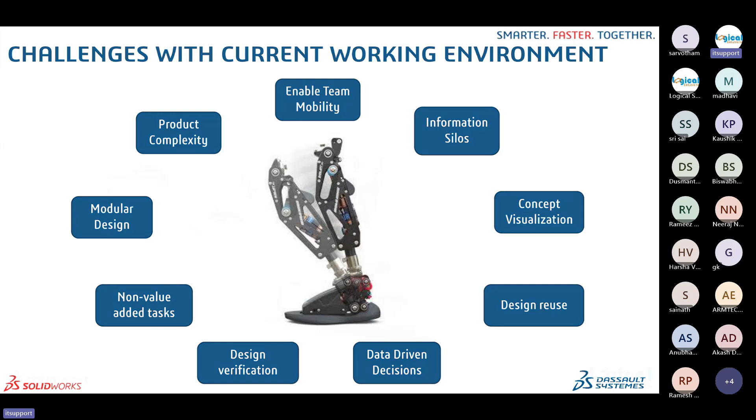For better understanding, I have taken an example: product versus platform. A few years ago we used different products to meet our daily tasks, but now everybody has shifted to platform, which brings all products into one platform on a need basis — download the app and use it. So platform is the future.

Let's take a moment to review some design tools and collaboration tools like Gmail and WhatsApp. Even though we use multiple products for collaboration, all these products are disconnected, and information from this results in an inefficient work environment. In personal life we have all moved from product-based to platform-based solutions.

Are we doing any justice to our work life? To address this and co-create collaboration in our work environment, I'm going to show you 3D Experience, and how it is very useful as a platform for collaborating across teams.

Another challenge: when we are working with other people, we are working anytime, 24 by 7, so we need to be able to work everywhere. How can we connect people by sharing ideas and driving innovation?

Now we'll see what 3D Experience is. 3D Experience is a cloud-based platform that helps businesses design, simulate, and collaborate on projects. It allows users to access applications for engineering, data management, and more.

Some features of 3D Experience include collaboration, data management, virtual modeling, and virtual twin experience. Collaboration allows users to work together in real time across departments and locations. Data management allows users to access and manage large amounts of data in one place. Virtual modeling allows users to model enterprise products and processes virtually.

In virtual twin experience, it provides a virtual model of the business, which can help reduce the cost of waste and investment. Also, 3D Experience is a named-user login.

Named user login refers to accessing the 3D Experience platform using a unique username and password tied specifically to an individual user, meaning you can log in from anywhere and any device, and access your personalized workspace and assigned software licenses rather than being tied to a specific computer or serial number. Essentially, it's a named user license where your identity is the key to accessing the platform.

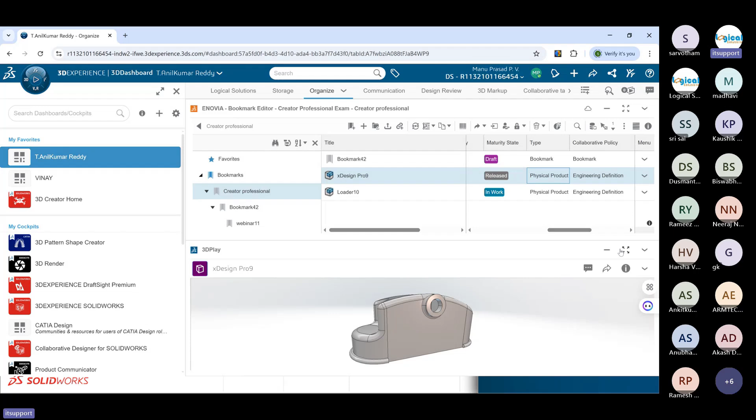So if the manager wants to review this part, he will just drag and drop it into the 3D play where he can see the part. And he wants to get a clear review of this part.

In the olden days, how they used to communicate for design review, they would take a screenshot of this part and attach it to Gmail, then send it to the particular person. But in the meantime, it may become data silos, because with so many mails, they may not know when they sent the mail, and they did not keep track.

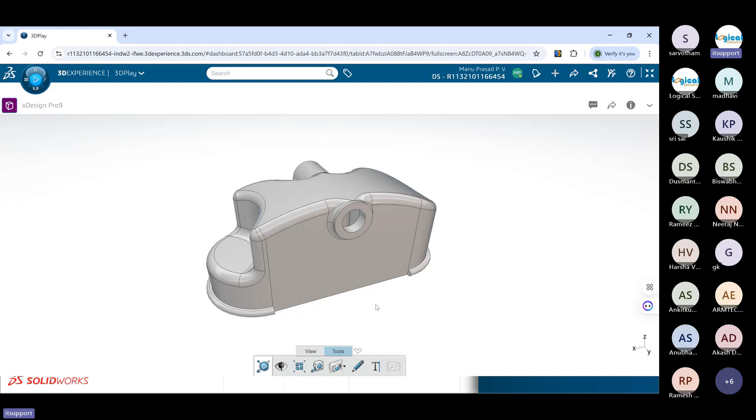So for communication purposes, on a platform like WhatsApp and Facebook, here the manager can directly communicate with the specific person. So here you will just mark this, and you can add text also.

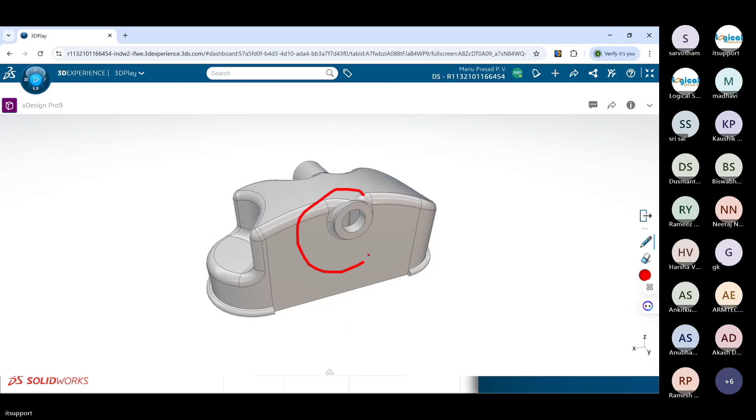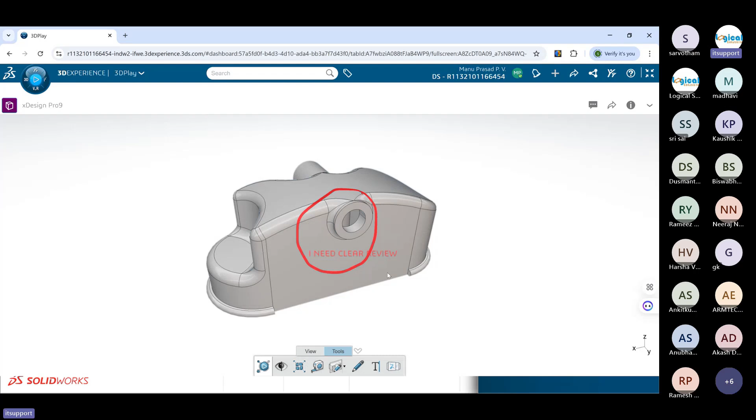You will add, I will write. I need a clear review, so I need a clear review that you can share to a specific person or a specific community.

So this is the community. I will select the community, 3D experience, and the title, and I will write the review. So I will publish this to the community.

So it will be published to the community. The person will get the notification when he is present in the community. So you will get to know that the manager has posted some design change, and he will see this one, and also he can ping to another person directly.

Just I'm adding the other person, so he can ping directly to another person, meaning for the design review. So after seeing this, Manu Prasad, what I told means I need just a clear review for this.

So for the clear review, you can just communicate with the person, the manager, like with a voice call or with a video call, and also you can share the screen for clear explanation of what he needs to change.

So after getting clarity from the manager, he will move to the design review. For that, some specific app is there, like collaborative life cycle. Here the designer or the designer head can know the maturity status of the part, whether it is in what work condition and what are the revisions.

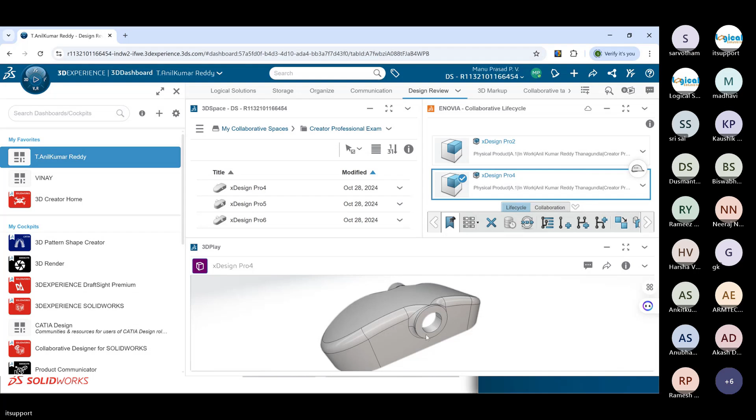For the design change, he needs some markings, some clarity, meaning some markings of where it needs to be changed and what is the specific location it needs to be changed. So for that he uses some other app called 3D markup.

Here in 3D markup, the designer can mark the drawings, and he can do the cut section of the part, and also he can check the volume query of the part, and he can generate issues directly from there, from the 3D markup. So we'll go for the 3D markup.

This is the 3D markup user interface, how it looks. So this is the part that the manager wants to review, the full review, and the designer gets to know that some of the designs need to be changed.

So he is using the 3D markup for clarification of the design review, what needs to be changed, and for the marking purpose he will open this one. So it is opened in the 3D markup.

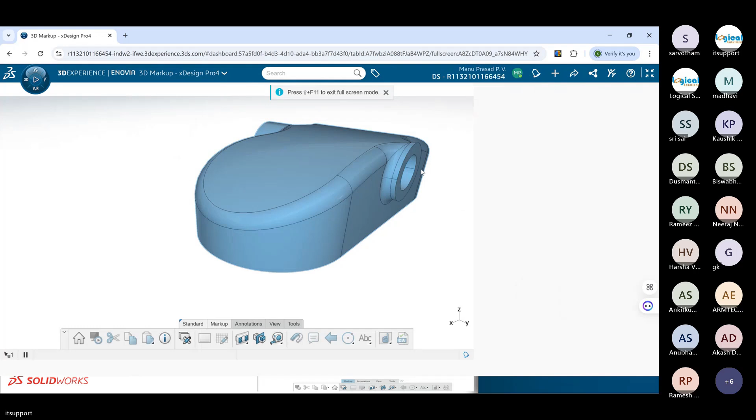So this part is opened in 3D markup. In the 3D markup, some of the tools, here you can see markup. Here you can do the sections, and also here you can do the direct compare, and here you can measure.

And here are the annotations, meaning we can turn on and off the annotations present in the model. Here this is the view, and we can set the appearance of this part.

Here this is the tools where you can check the volume query of the part, and also we can directly go to the relations, meaning it will show the relations of the part, and also it will show if any 3D markup we have done initially, so it will show in the relations. And also we can generate the...

This is the 3D markup. So he uses this markup tool for marking up the part clearly, like a PPT we can do, like 3D PPT, 3D PDF we can use this one.

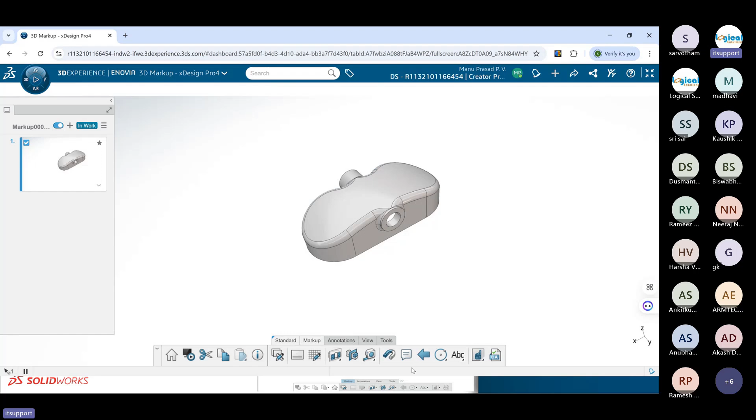So you will create this one, just with a single click you will create this one. So he will measure this one, he will measure, and you will add the text. You will add the text. This should be changed to 16 mm. This is another one.

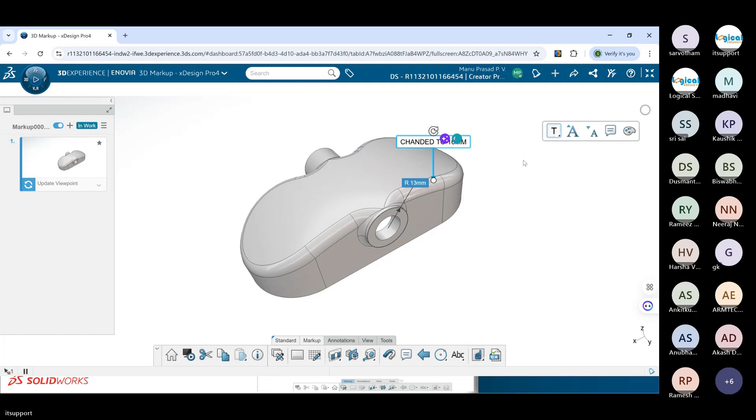This is how he can use markup and create a PPT. So for another view, like this is one view, I need to change, I need to mention, I need to mark here, and I need to show, but on the single slide I cannot show, it may be too clumsy.

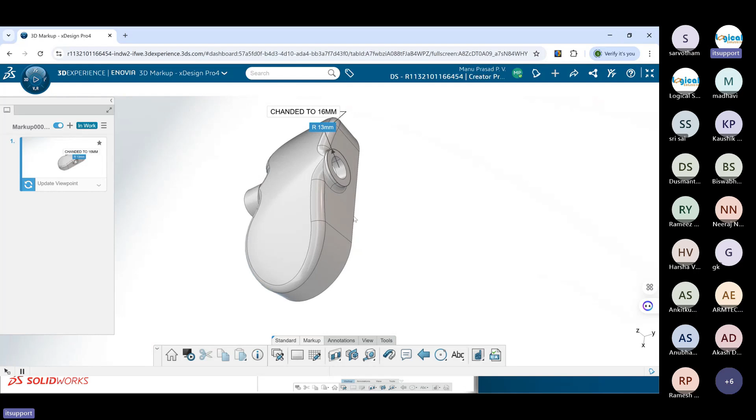So he uses another 3D PDF like PPT. So he will do the cut section, where I need to mark it, and also we'll mark it here. I can change this color also, yellow. I can change this, and he will mark it here.

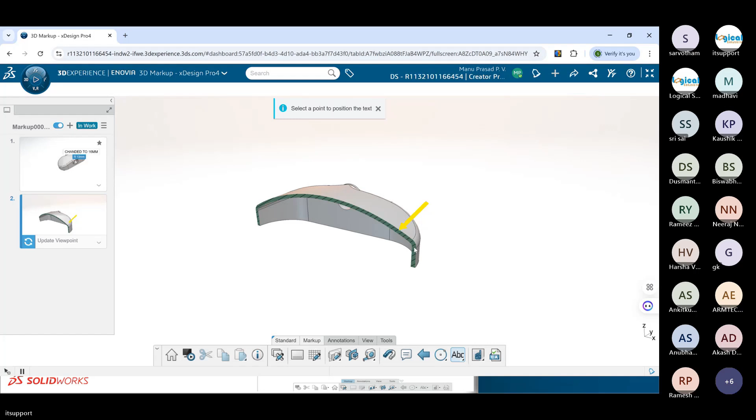Here, okay, just he will write to change the thickness. Change the thickness. Like this, we can use the 3D markup for clarity of the part, for the design changes. So you can mark it and you can publish, and you can attach the files for the design changes.

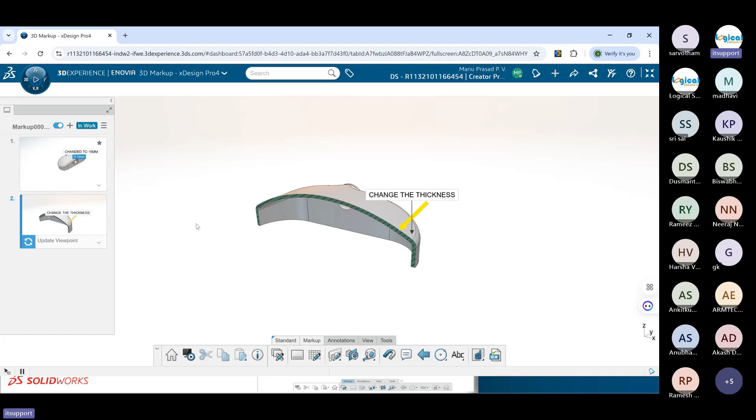So after getting this clarification, for the design change, you want to assign tasks for some specific team and specific people. For that, you use another app called collaborative task.

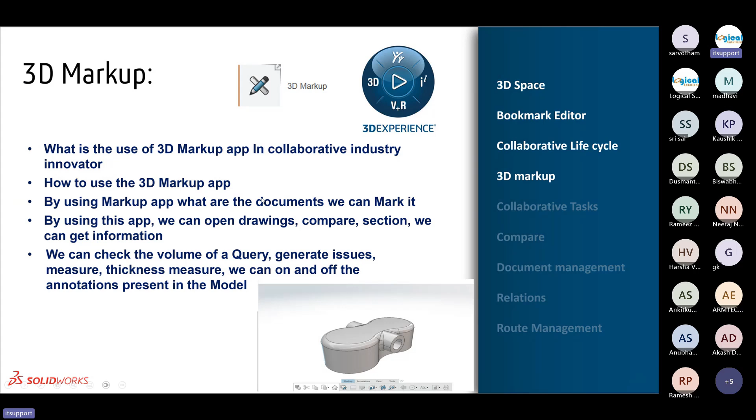So here he can set the work status for the specific team or the specific project, and also he can set the time of work start and also time of work end, and also he can track the work status of the task that has been provided to the specific people or the specific team.

So you will go to the collaborative task. Here you will generate the task to the specific team. So from the manager, he will generate the task to the designer, or the designer head will generate it to the specific team present in the team. So here just you can click new task. Here you can give the title of the task, meaning I will give like design changes or review. Design changes. Just you can click create.

So now the task has been created, but we did not assign any people to work upon this task, and also we did not assign any attached files for working upon the part.

So here we can set the priority of the work status, like low, medium, urgent or risk, and also we can set the maturity status, whether it should be to-do, in work or completed, and also we can set the plan date, when it needs to be started and when it needs to end. And also here we can attach the files, either directly taking the files from the collaborative space, or we can upload files from the local files also. And also here we can create some checklists.

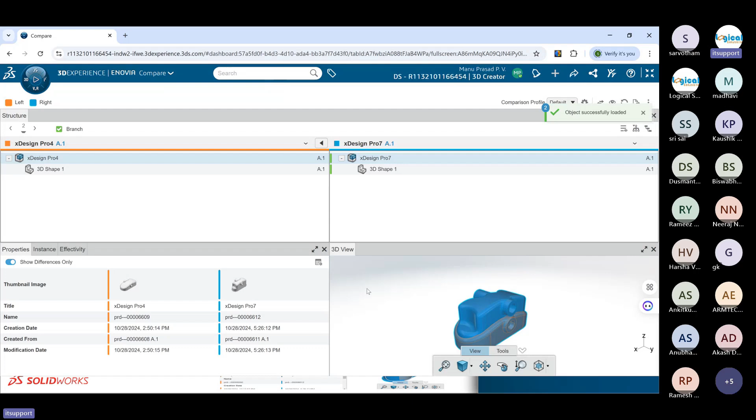So you will get to know what design change was made and in which part, and if the part is added with extra material or anything, you will get to know.

So here you can see this is the xDesign Pro 4, it is distinct with a different color, and also Xdesign Pro 7 is distinct with a different color. You can also see some preferences have been compared, like name, creation date, modification date. Here you can see thumbnail, type, name, revision, creation date - these are the preferences you can set for the compare.

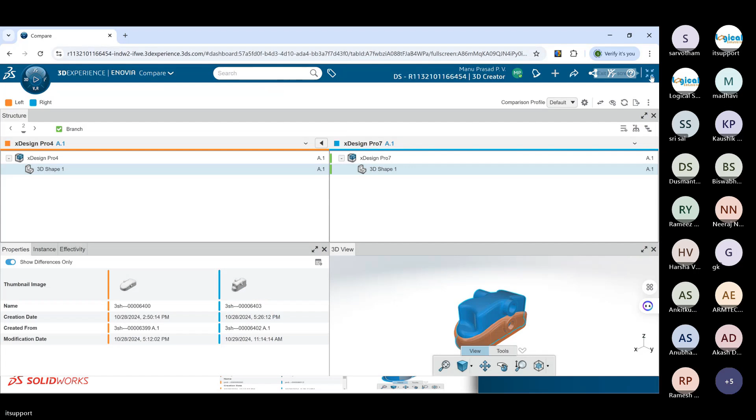So like this you can use the compare app for comparing the revisions or any part which has had design changes made.

So up to now we have seen the collaborative life cycle, task, 3D markup, and also design collaborate bookmark editor, and also organize for the storage 3D space. But as a manager you need to manage documents like both CAD and non-CAD data, and also manage some files which are present in the local disk as well.

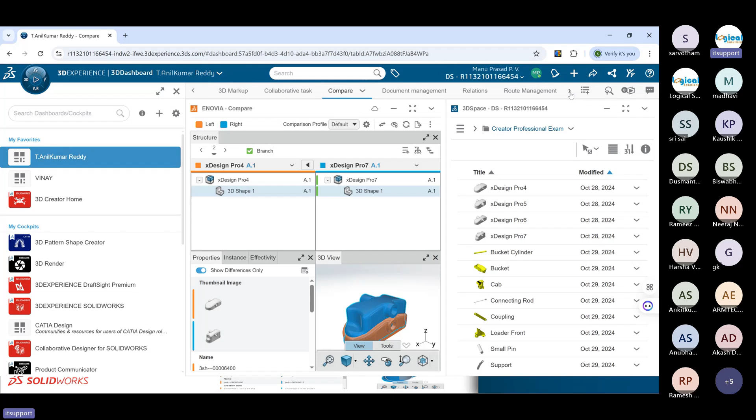So for that you can use the document management app. Here in document management app you can directly upload files from local files to the 3D experience platform, and also directly get the revisions present in the document, and go for the compare directly from the document which has been uploaded to the 3D space or document management.

This document management will directly sync with Microsoft apps like Word. Directly he can edit from there and save. This is the document management, how the user interface looks - here you can see there are upload and new document options. If you click the upload button, you can upload directly from the desktop.

Cancel, and also here we can filter, meaning we can filter when we operated like past year, past month, and past week.

Now directly we can upload this file from here, and also you can see the type of document, revisions, last revision, files, number of files present, lock status, who is the owner, and what is the maturity state, in which work condition it is.

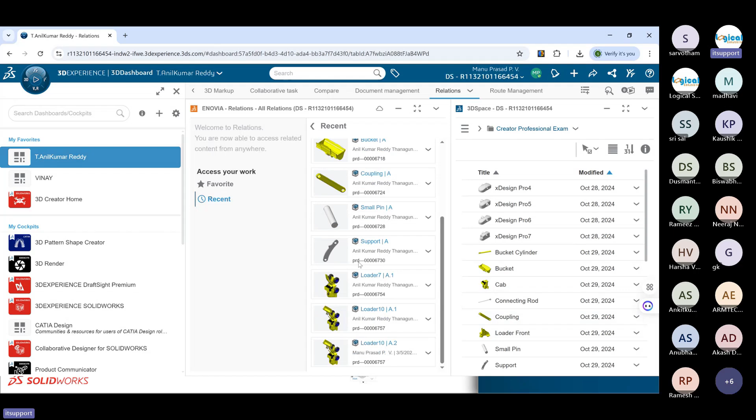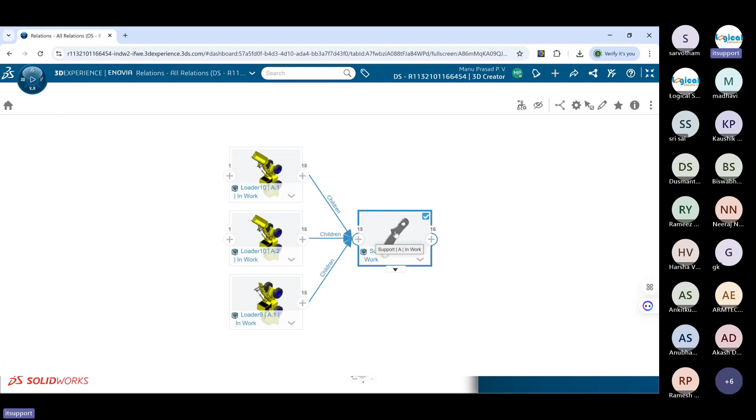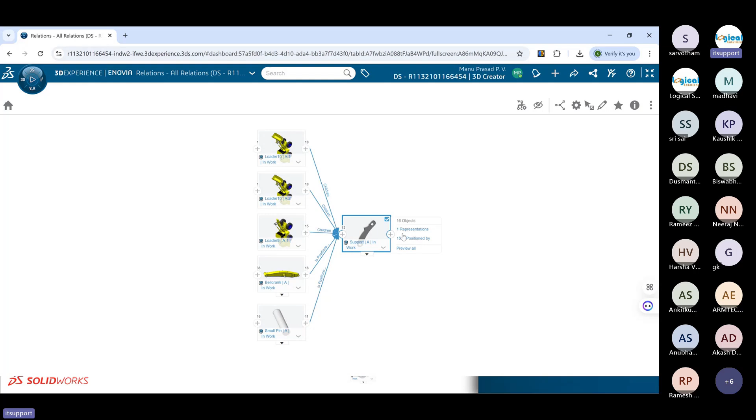Now I'm going to check with this one. Here you can see for this part the parents, these three are the parents, and you can see 15 impact positions when we change this part, what positions can be impacted. You can see, and also again 13 impact positions. So like this you can get the impact positions of the part by using the relations app, and also representations here you can see.

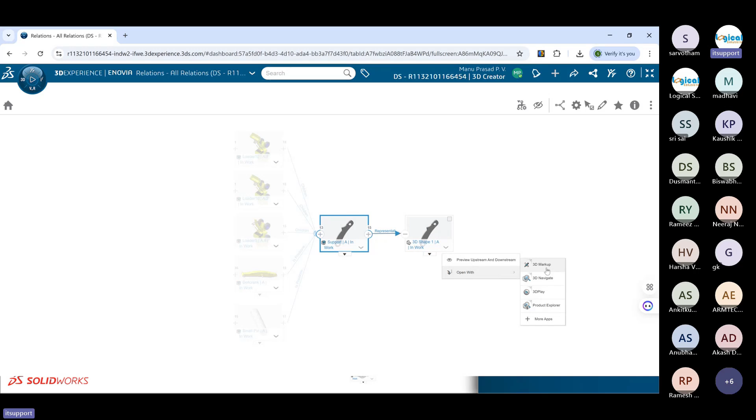Also you can open with direct 3D play, product explorer, and 3D markup. This is how we can use the relations app to get any part changes or impact positions, like when the part is linked with a specific assembly.

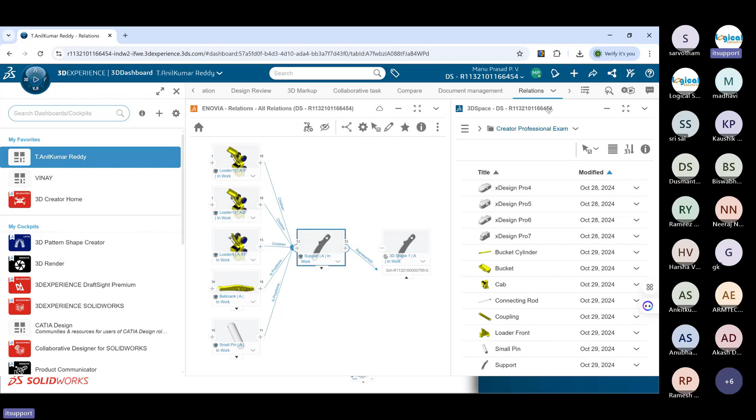So the next app is called route management. Route management refers to a system for streamlining workflows by defining and managing a sequence of tasks that need to be completed by different individuals within a project, essentially automating the review process, tracking approvals, and ensuring efficient design and release procedures across the product development lifecycle, allowing for better collaboration and control over steps within a project. Some key points of route management include task automation assignment.

Task automation means when you have created the task, the assignees will get notifications automatically. There's also collaboration enhancement, which has visibility and tracking, and version control, like a collaborative task. It combines with the collaborative task and gives the route.

Some use cases where we can use the route management include the design review process, change order management, document release process, and supplier collaboration. Now let's see how we can create the route.